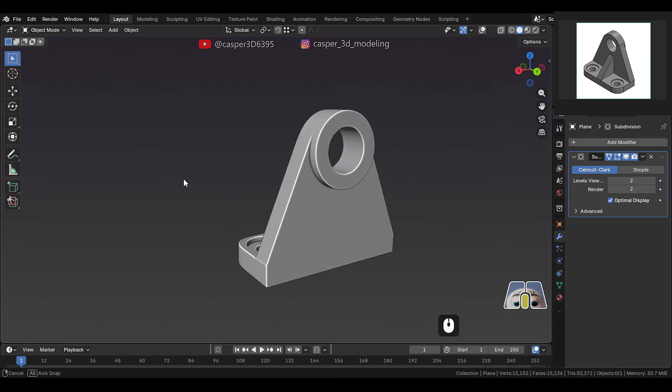Hey guys, welcome back. In this Blender video, we're going to model this mechanical bracket. It's a small and simple shape, but it's great for quick practice and also a good way to learn a few useful modeling techniques along the way. So without wasting any time, let's jump right in.

First, let's add a plane to start off. Then scale the plane down a bit and make it smaller. Now in the middle of the plane, add 2 loop cuts to divide the mesh. Then select this edge and delete it. We only need half of the plane.

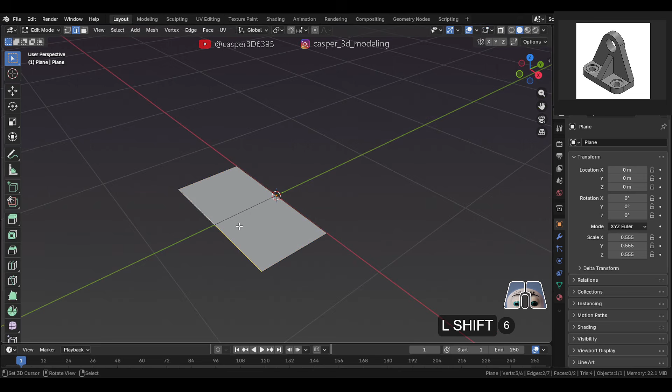Now select this edge and move it in a little because this part looks a bit too big. Then select this edge and move this part up. After that, scale this edge horizontally inward.

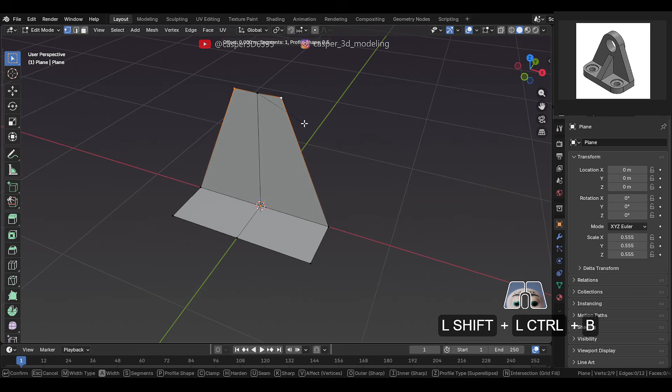Now select both of these vertices and vertex bevel them using Ctrl-Shift-B. You'll notice the bevel goes all the way down on one side, so to fix that, go over here and enable clamping, and that will fix it.

Now if we look at the reference, we can see a circular part extruded out at the back. So over here this must be fully circular, so undo the bevel we made, and we'll do another method to achieve that. First, select this vertex, then press Shift-S and bring the 3D cursor to that point.

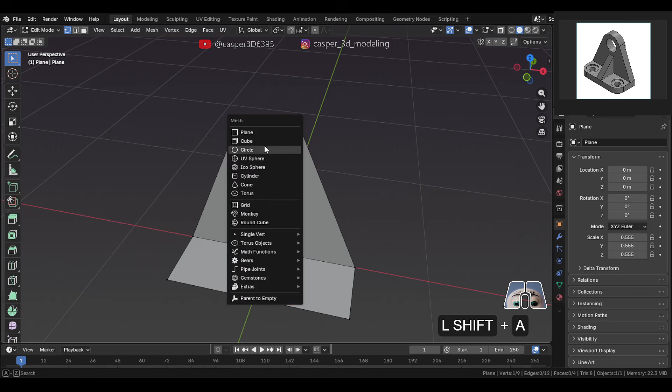Now add a circle. Set the circle to something like 16 vertices. Rotate the circle and scale it down and make it smaller. Now we want to fit this circle perfectly here.

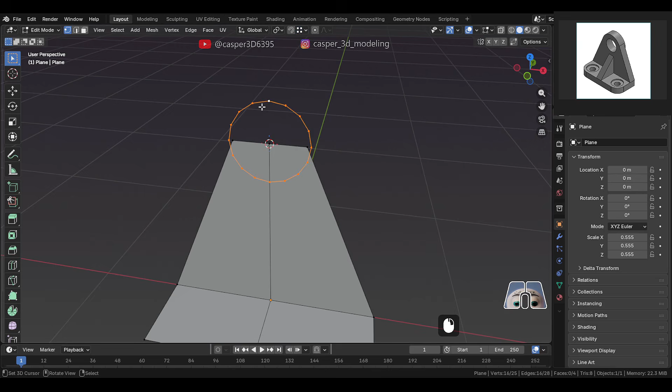To do that, first select this vertex to make it the active vertex. Then go to the snapping panel at the top and enable vertex snapping. Also, enable the option that makes the active element snap. Now move this circle down and snap it to this vertex.

Then change the pivot point to active element. Now we can scale the circle from that active vertex and fit it nicely in place. Scale it so the side of the circle lines up with this edge.

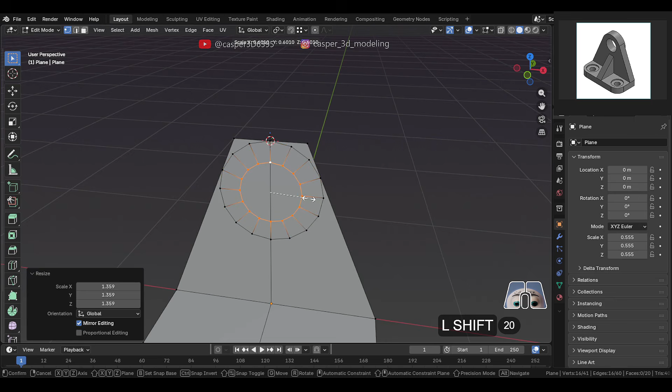Now extrude the circle and scale it inward to create the hole area. Next, select these edges and delete them.

Then select all these edges, something over here. After selecting all of them, press F to fill this part. Now select these vertices and join them.

Here, just add some cuts like this with the knife tool. We won't touch the middle circle because we need it perfectly circular, so we'll add the cuts only around it.

Then add 3 loop cuts here, which we need here to connect properly. And over here, add 2 loop cuts. Now connect these vertices like this.

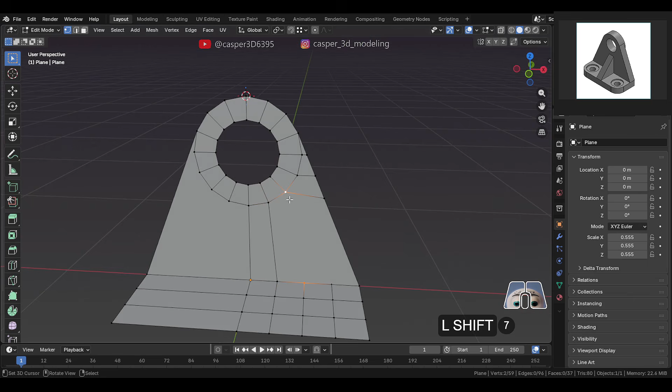Next, use the knife tool and add a cut here. Then slide these vertices slightly down. Now add a few loop cuts here.

This corner in the reference is rounded, so select it and press Ctrl-Shift-B to bevel the vertex. Here enable auto merge at the top. Now bevel again so the vertices snap and merge directly where they meet.

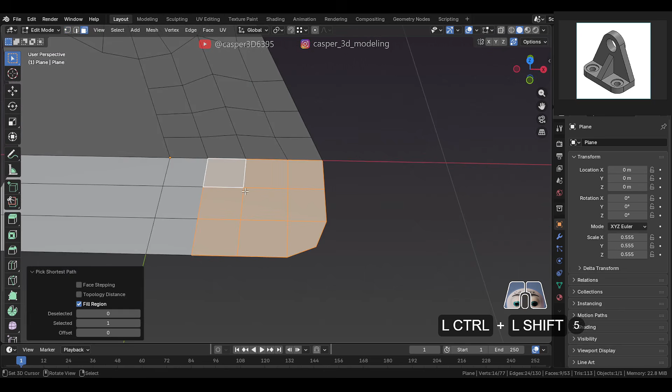Next, select this edge, move it, and snap it to this vertex. Now we'll create the hole here. Select these faces, then inset them slightly inward.

After that, use Loop Tool's circle to make the shape perfectly circular. Then scale, move, and fit this circle nicely over here.

You'll notice the circle is slightly rotated, so to align it perfectly straight, go to the snapping options and enable rotation snapping. This lets the rotation snap while rotating.

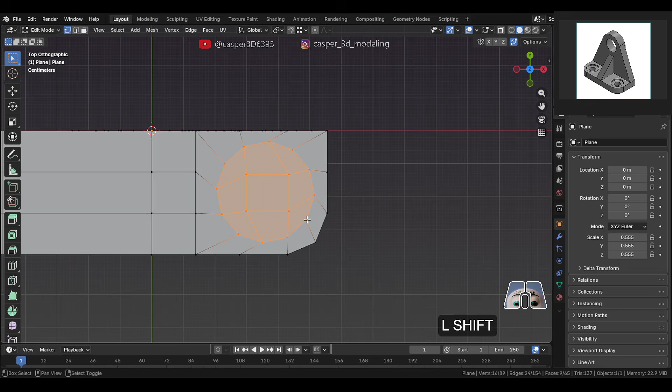Now select this vertex so it becomes the active one. Then rotate the circle and snap it to align with this vertex. And now it's perfectly straight. Next, inset the faces inward a little and then delete the faces to create the hole.

Now here, to mirror this on the other side, select the whole mesh, go over here and choose Symmetrize. Then adjust the axis so it mirrors in the correct direction. And now the shape looks good.

Now we'll add solidify to give this some thickness. First, apply the scale so there are no problems when we add the modifier. Then add a solidify modifier.

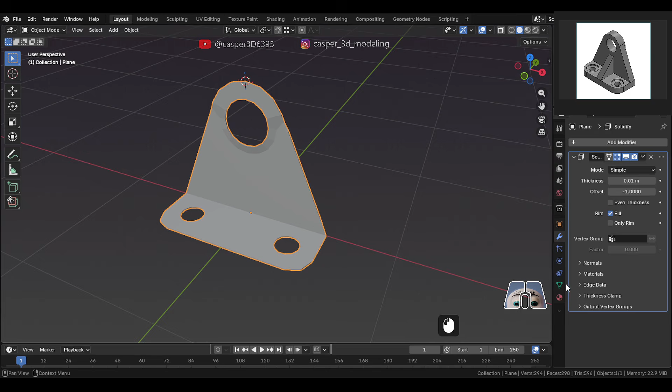Right now it behaves a bit weird, so if we go here and turn on face orientation, you can see that some of the normals are flipped. To fix that, press Shift-N to recalculate the normals. If it flips the wrong way, just enable this flip option here. And now everything looks correct.

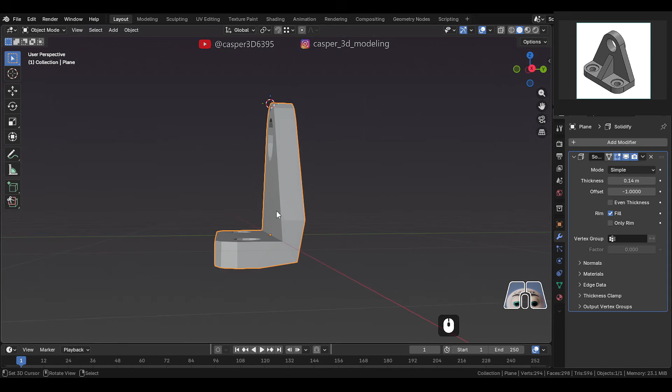Now activate the solidify modifier again, and then here adjust the thickness value. At the corner here, the thickness doesn't look right, so enable even thickness. It still looks a bit off, so here, let's change the mode to complex. And now it looks much better. Now go ahead and apply the modifier.

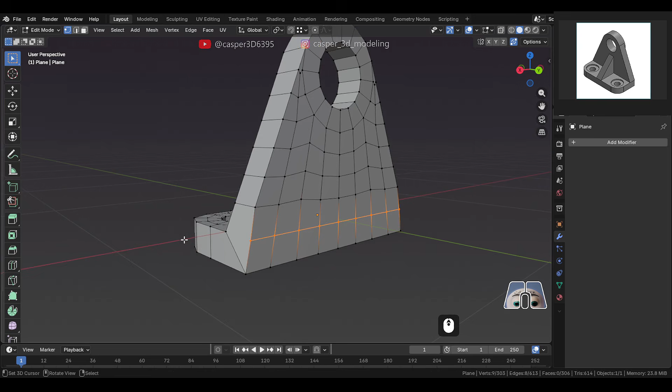Now we'll fix this area a little. Use the knife tool and add a straight cut here. Then move it on the Z-axis and snap it to this vertex. After that, connect this over here. Now move this vertex and snap it so it lines up with this one.

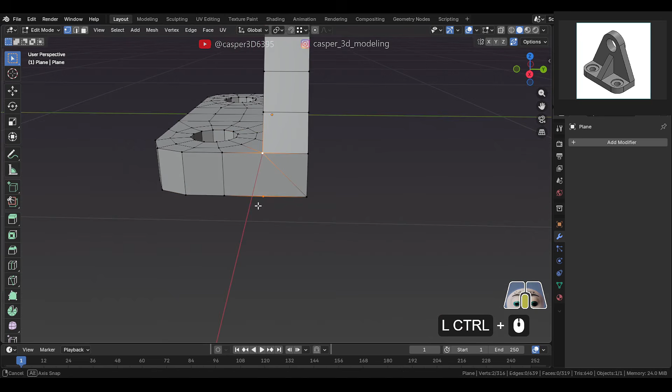On the bottom side, we'll do the same thing. Add a straight cut over here, then move it and snap it to this vertex, and then connect this. Now dissolve this edge. Over here, slide and merge these vertices, then slide this part slightly a bit.

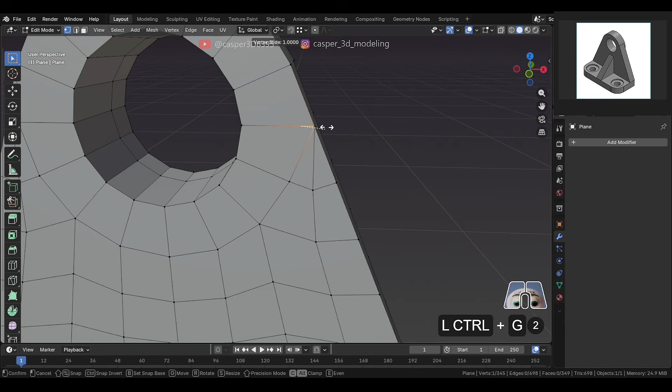Next, select these faces and extrude this circular part out. On the front part, we don't need a perfect circle, so just merge these vertices here to reduce and have some space. Then dissolve this edge, and now this area looks fine.

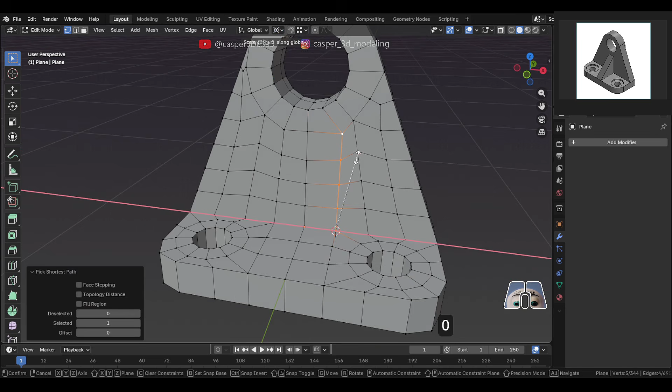Now we'll create the sloped part. First, just line up the edges nicely. To straighten this line, first bring the 3D cursor here. Then select this edge, and here change the pivot point to 3D cursor. Now press S X 0 to flatten it. This will straighten the line from the 3D cursor position.

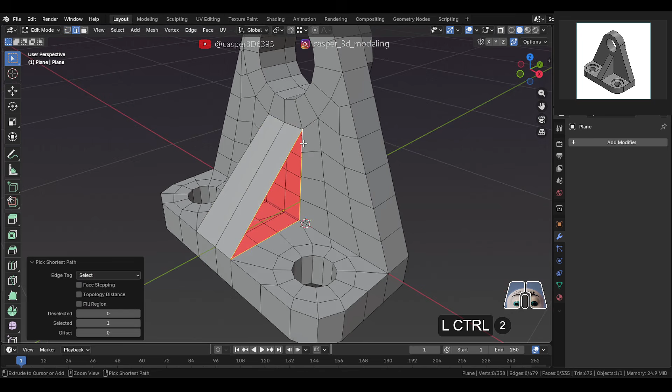Then select the whole edge and slide it inward a little to make this section slightly smaller. Now select and delete these faces to open the area. We'll only make the changes on one side, the other side will be mirrored. Then select these edges, press F and fill this part. Then select these edges of this part and fill this area as well.

Over here you can see 5 edges meeting at this point. So on this side, add 4 cuts, one less than the other side. That way the edges will connect cleanly. So on this side, try to add 1 less edge than the side you're connecting to. Now connect the edges like this, how I do.

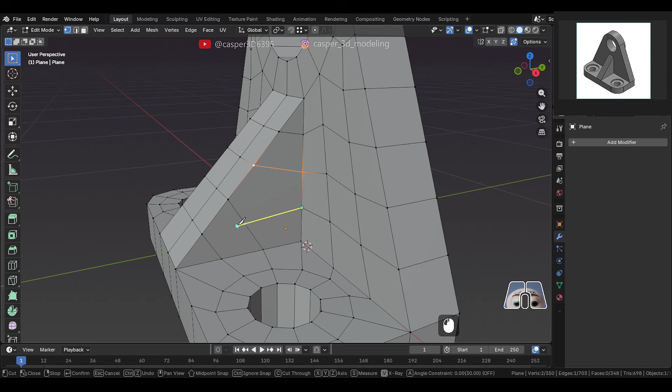Here you can add the cuts in different ways too, but try to keep it all quads and evenly spaced. If the side edges meeting at this point are balanced, it will connect here cleanly. And now this part looks good. Next, mirror everything to the other side using Symmetrize like before.

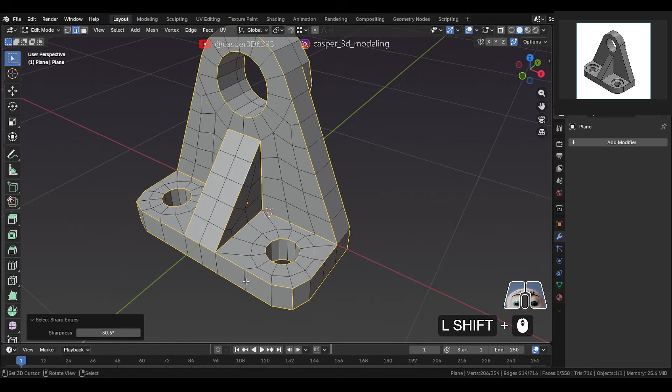Now we'll bevel all the sharp edges. First, select any sharp edge, then go here and choose Sharp Edges to select them faster. Adjust the sharpness angle to control how many edges get selected. If any edge is missed, just select it manually.

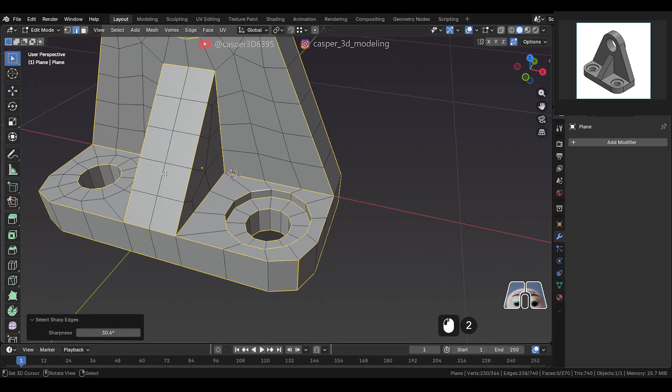Okay, so over here, this part needs to be slightly inwards. So select these faces and then press Alt-E and choose Extrude Manifold. This will extrude it inward cleanly and avoid messy or overlapping faces inside the mesh. Now again, select Sharp Edges and make sure all the sharp edges are selected properly.

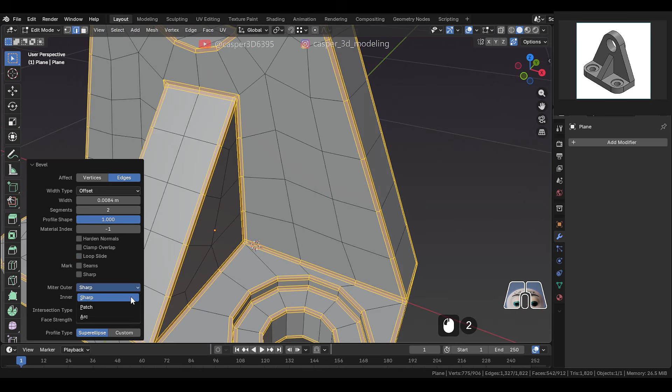Once that's done, bevel all the edges. Here, set the profile to 1. Then uncheck Loop Slide and Clamping. Change this option to arc so the corners become arc-shaped. Then connect this arc section like this. Over here, this unnecessary edge got beveled, so select it like this and merge it here.

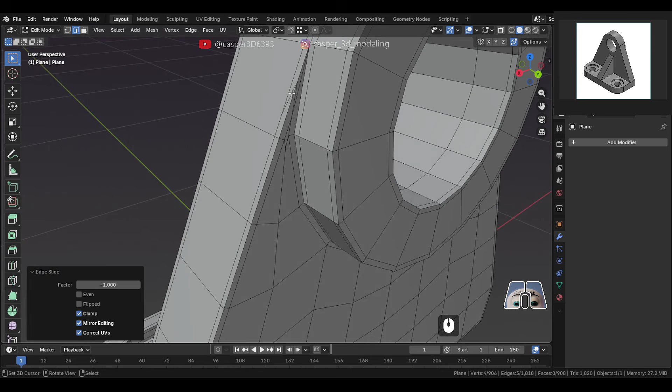Now we'll clean up this messy area after the bevel. So select all these unnecessary floating edges created while beveling and then dissolve them. Then select these vertices, press M and choose Merge at Center. Then dissolve this edge. And now this is fixed nicely and it will stay tight here.

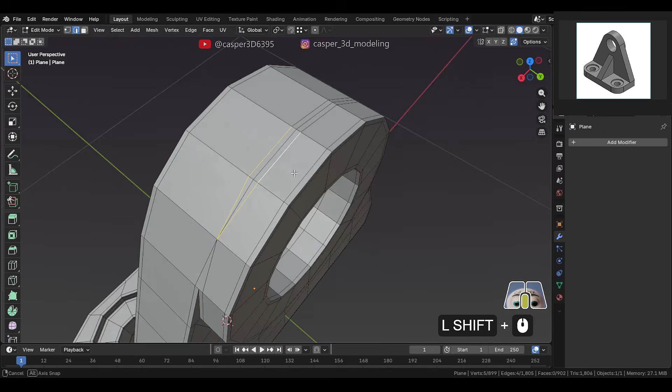Here, select these vertices, slide and merge them here. Then dissolve this edge, dissolve these edges as well. And now this section is clean. Next, mirror everything to the other side again.

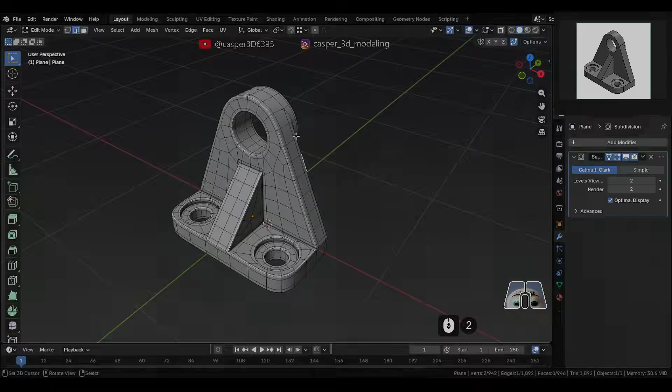Now shade smooth the object, then add a subdivision surface modifier. And now, as you can see, the model is nicely done. All right, we're done modeling this shape and it turned out great. It was a good, quick, and useful practice too.